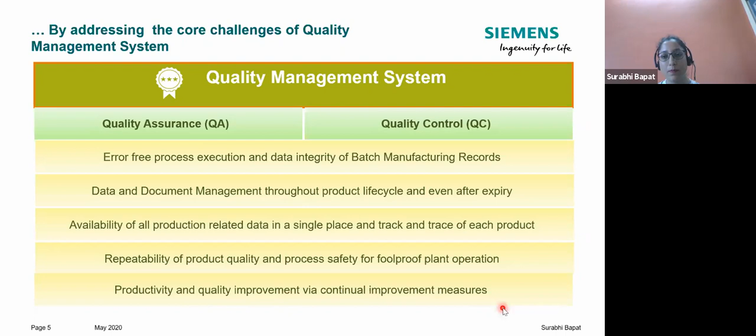So we will first start with the bottom layer or the production layer because we all know that if there are any gaps in this layer, they are going to make their way to the top. So making the production layer robust is very, very important. Now, the first topic that I am going to introduce today is called digital twin or a virtual twin. All of you would definitely have heard about this. You also would have read about this.

But before we go deeper into the technology part, let us get a perspective on why we talk about digital twin when we talk about quality or addressing the regulatory challenges. Let's take a greenfield plant wherein the actual plant is not yet ready. If I, as an experienced quality professional, with all the experience that I have on taking batches after batches, products after products, can see a virtual plant in front of me, and when we say a virtual twin, it should definitely look like the actual plant, but it should also be able to behave like the actual plant. It should have all the properties of the actual plant. Only then it is a true virtual twin.

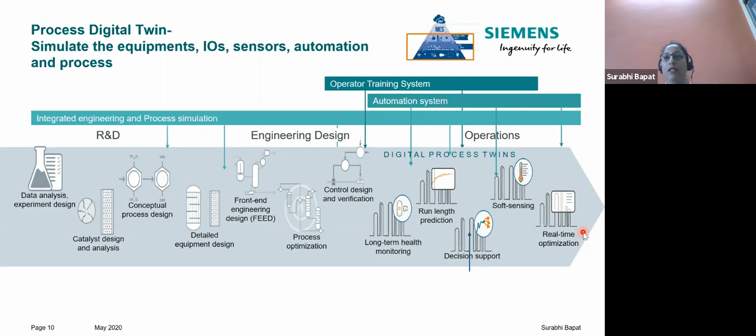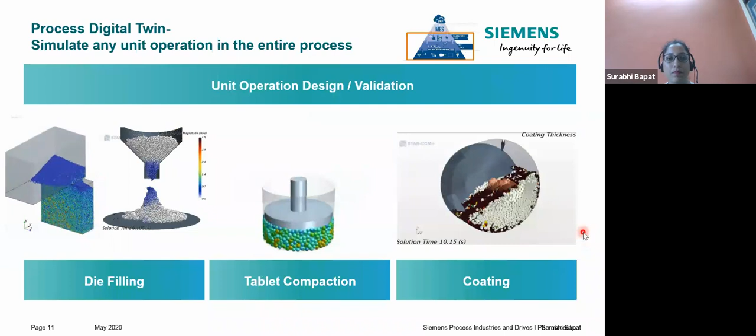Similarly, if we have to do a similar type of simulation, a similar type of analysis for a single unit operation, even that is possible. Also, with the technology, what is possible now is a flow simulation. So, typically, whenever we talk about improvement in the quality of a product, now a product quality is a very big topic, and there are so many unit operations, so many ingredients, I would say, that go along. So, whatever I'm showing you are each of these little pieces which help us to give us an insight to improve ultimately the overall product quality.

So we have tools and tackles available in the form of multi-physics simulation, which is based on computational fluid dynamics, that basically allow us to understand how the different flows interact. So in a digital twin, like I said, if we are simulating the entire process, then also to understand within the process how the flows interact with each other is also very important, very crucial. How we can improve the performance of the equipment thereon, improve its energy consumption, and so on, of course, is also a parameter that can be analyzed.

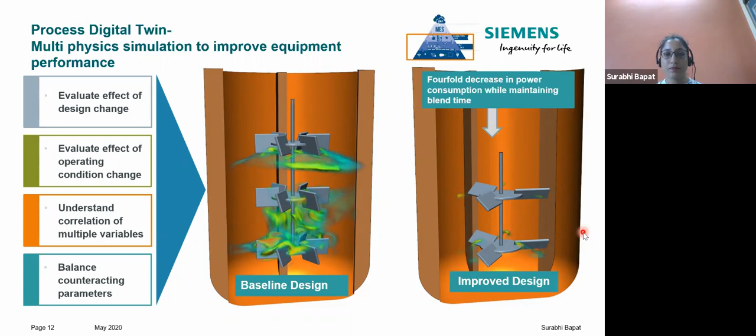So, before I come to the plant digital twin, I would just like to say one statement about the different process digital twins that we saw. See, digital twin is always understood as a topic which is relevant for production, which is more relevant for understanding and gaining insights on yield improvement, on productivity improvement, optimization, and so on. But in our opinion, a digital twin as a concept is extremely useful even from a quality point of view. This is the reason why we started today's presentation with this technology topic.

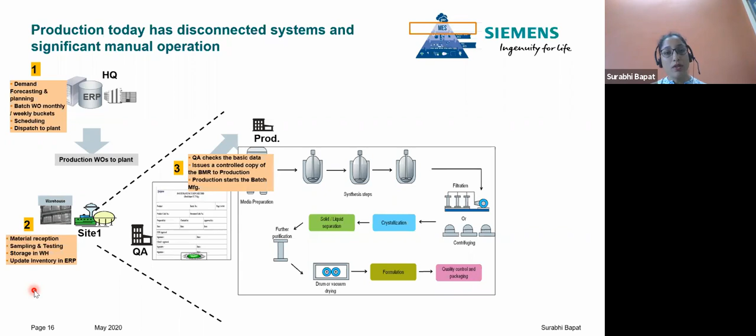When the work orders have to flow into the production area, that is where the manual work starts typically. So the quality team checks the data, issues a copy of the BMR to the production. The production starts, the BMR is filled up manually.

So we might have an automation system which is doing process control, but in a lot of plants we don't have an integration between the automation system and the main core system where there's no MES. So we have manual filling up of the BMRs, and finally what happens is after the entire production is complete, there's a big chunk of documents that requires to be cross verified and checked. Now

MES is this one thread. So what we didn't have here, we saw that ERP is disconnected from the actual production. The data from the automation system is not flowing into the BMRs. The warehouse management system may or may not be connected to the production system. The quality personnel does not have full visibility or transparency of the production process.

So although we might have multiple systems individually controlling little parts. We have an ERP, we have an automation, we have a warehouse management system, but there is no thread that is linking all of them together. And this thread is nothing but an MES system, like we all know and like we all understand.

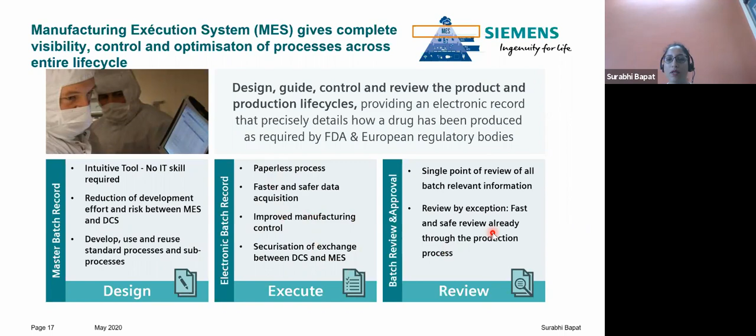How it is executed. So definitely, it's a paperless process. There is no need to fill in the data manually in an electronic batch record. It flows in directly from the DCS, and we know that we do review by exception. So the review process or the checking process becomes very easy.

Again, we won't spend much time going into details of the features because all of you know very well that MES looks after master batch records. It looks after material management. It can also do weighing and dispensing. It has tight integration with automation and ERP. It is able to integrate the packaging system. So this is known to us.

But the differentiators that I would talk about today is first of all, MES systems have evolved in such a way that they actually form the link between layer 2, that is our production layer, and the enterprise layer. And the more we talk about technology, the more we talk of digital solutions, it's very important for us to understand that if we have to gain any insight as a quality person, what would I want to do?

I want to improve the quality of my product. I want to know which batch went good, why it went good, which batch did not go well, why it did not go well. I want to have all these insights. But in order to have these insights, we need data.

Now, MES is one such system which aggregates all the data from the current and the previous batches, all the batch related relevant data, not just the production data, but also the data for raw materials, for the work orders, for the operators, everything in one place. And this can be really, really used in a beautiful way to gain insights.

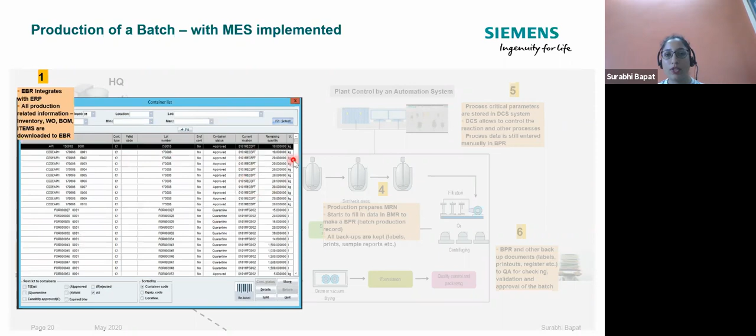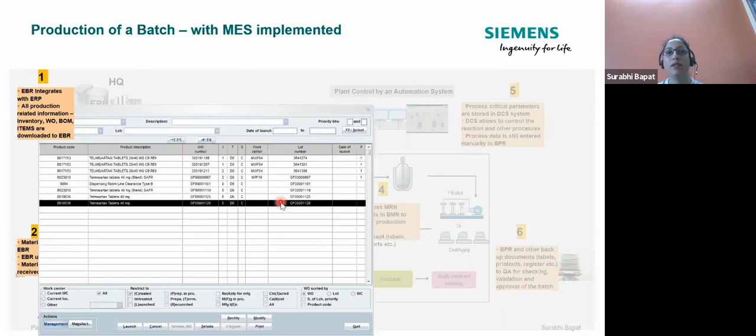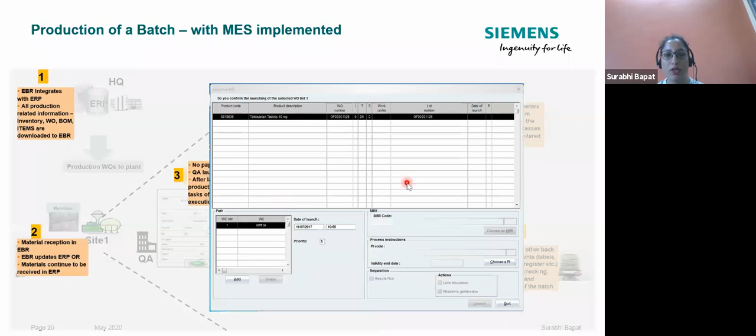Definitely, there is no need to have a manual process to launch the work orders. They are automatically done in the EBR or in the MES system. So the work order in a MES system would flow exactly from the ERP system into the production. We would then have the dispensed material. We would also be able to track what materials are getting used in a particular batch.

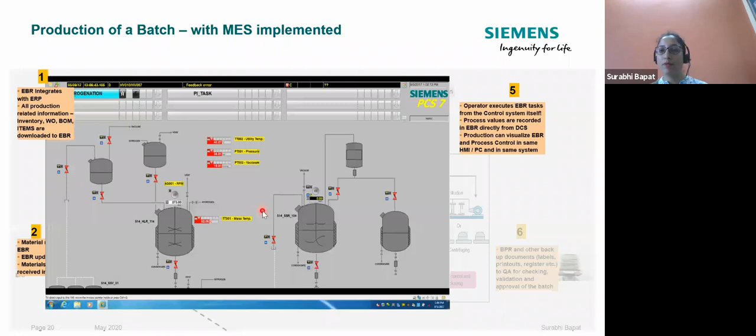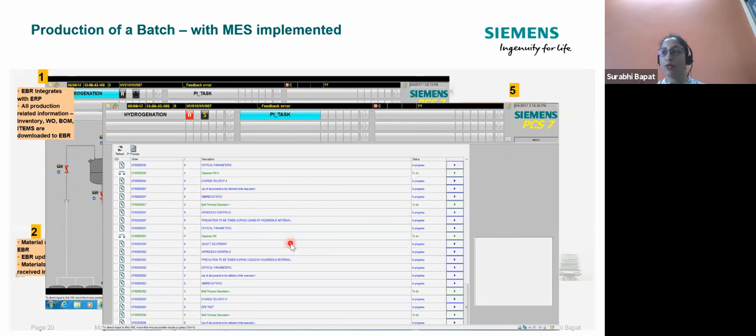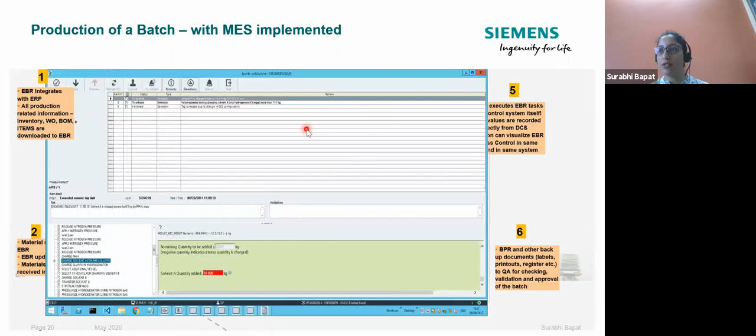The production starts and then the process values are recorded into the recipe, into the BMR directly from the DCS. So there is a close integration between the DCS system and an MES system. Like we saw in the other case, there is no need for any manual record filling. And finally, when we are doing the checks, it is only checking the deviations, only the exceptions, and therefore a lot of time gets saved. So that was about the middle layer.

Now we move to another layer, which is again very important. We started from the production layer, we went to the middle layer, and now we move to the enterprise layer, which is the layer where we aggregate data, we analyze data. Now, why is this important from a quality standpoint? Like we saw earlier, continuous improvement in the quality of products is also one of the goals of a quality management system.

So, when we talk about data, we also learned that having automation, having an MES system is not just important because of their own features. Automation is not important just because we want to have automatic process control, but automation and MES are also providing us rich data from the different batches, which is able to give us valuable insights for continuous improvement.

So typically, when we talk about data analysis, there are different ways to do it. One is descriptive analysis. So we say, okay, what went wrong? What was not okay? And we are spending time on this topic because we see two things typically happening. One is repeatability in the quality of products. That's a tough task sometimes, ensuring that we have consistency in quality. And second is, how can I improve the quality of my product?

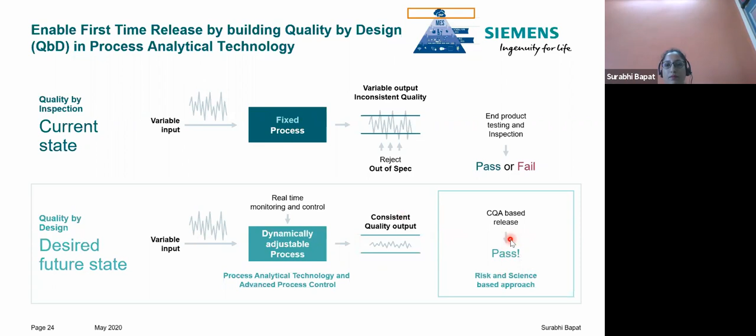Moving on, another important topic that we see very relevant to the industry today is golden batch analytics. Now, I won't spend much time on the actual concept of golden batch and the influence of golden batch on the batch performance, we all know it. But I would definitely say that we have technology that enables us to understand how our batch is performing vis-a-vis the golden batch.

Now going on further, because we saw different types of analysis are possible, and remember, we are now at the top layer, and all this analysis that we are talking about here is possible because we had certain systems, certain technologies that we spoke about in the bottom layer and in the middle layer. All this data from batches is actually coming from there.

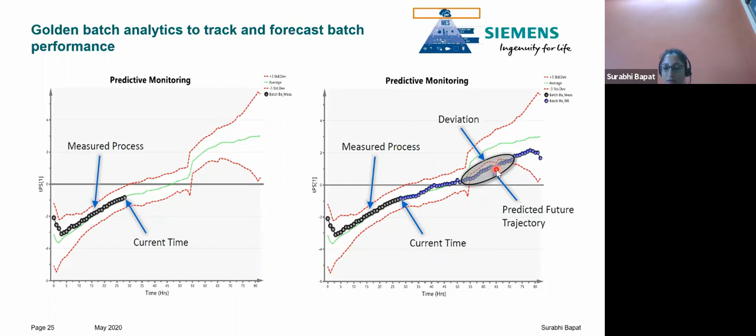Now, moving from analytics and its correlation to quality, how we can improve quality, we now move on, and we are still at the top layer, the enterprise layer. Even if we see the scenario now without any of these technologies getting deployed, we see a lot of tools and a lot of softwares are still used for little purposes. So we always have a bunch of systems in place, and data is scattered all across.

So if a particular decision has to be made, if a quality person wants to analyze what went wrong with my batches in the last month, or what was good with the good batches that I had over the last 1 year, he definitely needs all the data from these multiple systems in one place. So what we see typically is scattered systems, and data not being in a central place.

So we have smart softwares available now which do two things. One is they aggregate data. So you can have your data in multiple systems; as long as it's an electronic system, it's fine. It can be an Excel file or it can be LIMS, it doesn't matter. They aggregate data from these multiple systems. They contextualize data because data, when it converts into information, means different things for different people. For a quality person, the KPIs or the kind of analysis would be very different from somebody else.

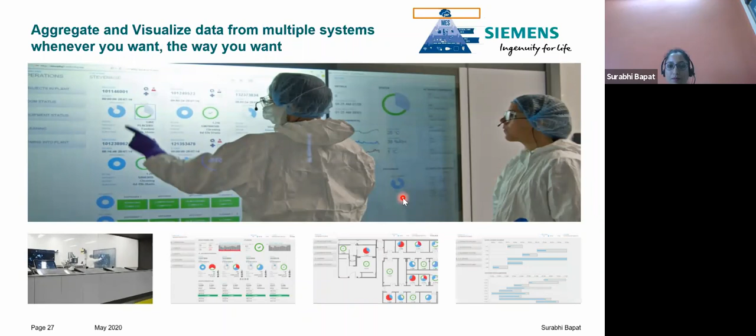The dashboards, yeah, they are good, they look good, that's okay. That's not the heart. The heart is, and the pain point that we address here is, all the multiple systems are brought together in one place.

So with this, let's understand some key takeaways from today's session. Because we talked about a lot of technologies. We started from digital twin to automation. We spoke about MES and then we spoke about analytics. So let's do a nice recap of what all we learned.

So, first of all, we need a holistic view from production to the enterprise layer to address quality and regulatory challenges. So, if we want to understand this topic fully, then we have to go across all the layers. This is the first thing that we saw.

Second, digital twin can enable to identify and address quality gaps and improve the overall quality management system. So, one always wonders, why should I have a digital twin? I only have to check the records, perform the audits, and ensure that the quality is perfect. How does digital twin help me? So hopefully we are able to address that question effectively in this session.

That digital twin would really help to identify those gaps, those improvement areas which otherwise are difficult to isolate in a running plant, in a real plant.

Automation integrates seamlessly with the MES and ERP system to build a tight ecosystem. So, we are not talking about automation in its regular purpose. Of course, it will do what it is meant to do, and we all know how it helps in improving the quality. But, like I highlighted, the benefit is in the ecosystem. The benefit is it talking to MES, talking to ERP, talking to multiple systems, and then bringing a cohesive environment.

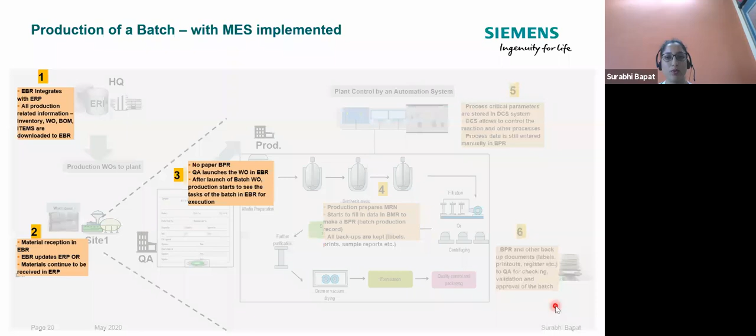Now, like we said, let's understand the different parts of automation. And so, one part that we all know and understand is that automation helps in process control. Yeah? It helps in ensuring that the process happens the way it is expected to be. So, I'm just trying to go to the slide where we talked about automation so that it's easy for Mr. Madan Mohan Khanna. Your question.

Okay. So we all know how automation would help us to ensure that the operating procedures are followed. Now, how can it improve the overall efficiency? For this, we really have to look into little points. What if we don't have the automation system? What would happen? First of all, whenever we talk about execution of process manually, definitely it's going to bring in errors. And an automation system, with the inherent features that it has, can not only control a process, but can also execute the operating procedures seamlessly and accurately.

So there was one more question from one of the participants: if the set points are put in manually, how effective is the automation system? Yeah, you are absolutely right. The moment there is a person involved, or the moment there is anything done manually, there is always a chance of error.

So if we are talking about a foolproof system, when we talk about MES and automation coming together in a plant, the SOP or the procedure is running in the MES. It is defining the task that has to be done. The task is then executed by the DCS system. The records are automatically fed from the DCS system into the BMR, and the process goes on. So if we implement a fully automated system, we get the best benefits. We reduce the chances of errors to the bare minimum possible. We improve the speed of operation, because

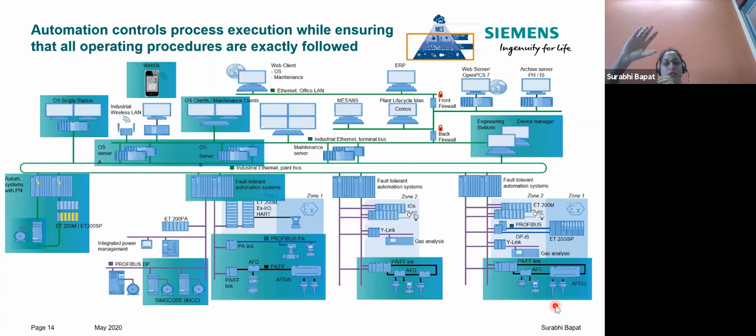Automation, digitalization. So see, digitalization is a very big word, I would say. What we really talked about today in the production layer and the middle layer is the digitization part. Yeah? When we say digitization, it is enablement of data. And what we talked about in the enterprise layer, the last part on the data analytics that we spoke, that was really the digitalization piece, where we say we are doing quality by design, we are doing analysis of our batches, we are trying to gain insights. So automation, MES, and digitalization, I would say, are closely integrated with each other.

Okay, let's see. So there's a question, does MES modules address automation as well? Now, this is a question from Mr. Anand Prakash. So, see, MES is a different concept than automation. So, what you see on the screen is a separate, so it's called a distributed control system. It's a separate software that is used for process control. So, if you see in this diagram, typically you have all of these IOs from the field. They are connected together to single stations or clients, and we have the distributed control system or the DCS software that is installed on this. So this is what is automation, which takes care of process control.

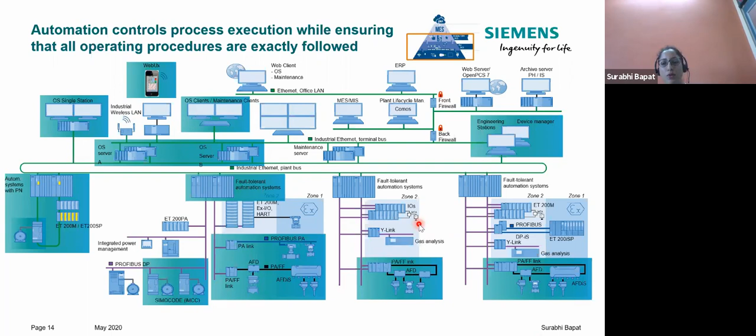MES integrates with automation. So let me move to this slide. Yeah. So when we talk of an MES system, which I keep saying is a thread between the ERP system right until the final production and packaging, automation system, which is doing the process control, would integrate with the MES system so that any data in the automation system is automatically pulled in the MES system, and typically this is done when the BMRs have to be filled up in the actual production. So that is how integration of MES and automation takes place. Okay.

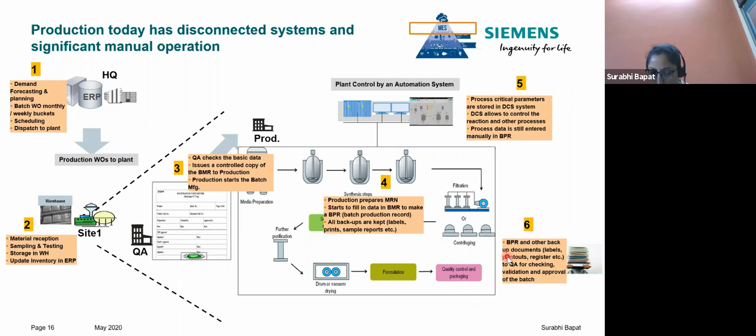There is one question from Mr. Chintamani. Does this system cover all FDA and other applicable regulations? Many FDA offices require manual data. So for sure, all the regulations that are cited in the FDA, all the systems that we spoke of effectively address, and like I said, they are compliant also to 21 CFR Part 11 standards. So yes, a definite yes there.

If there is any manual data, we really need to see. However, as far as the first part of your question is concerned, yes, all the regulations and all the standards are fully followed.

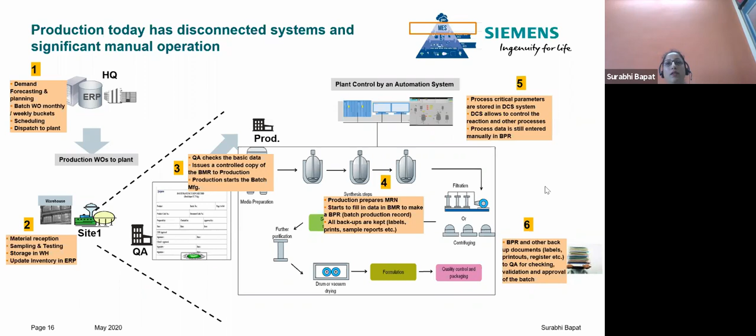Okay, there is one question on reliability of data. So does it ensure reliability of data? And I presume probably you're relating to all the layers. There's a question from Arun Gupta. And if yes, how is it done? Now, see, when we talk about reliability of data or integrity of data, when compared to a manual operation, and we compare a manual operation to an electronic operation facilitated by an automation and a MES system, for sure the reliability of data would be much more, because the inherent errors that would come in a manual operation would not come.

So whether it is picking up of the process parameters from the DCS and entering it into the BMR, whether it is integration of the warehouse and the ERP system into the MES system and the work orders getting generated from there, whether it is the deviations that are recorded in an MES system. I believe strongly that the moment we have these systems integrated with each other, and this word is very important, isolated systems, no good. An MES system integrated with the automation, with the ERP, with the analytics layer on the top. The moment we have this, I think reliability of data is very effectively ensured.

The second point here is these systems are compliant systems, meaning they are designed in such a way that they would not enable tampering or breaching of data. So, be it automation or be it MES, usage of compliant systems is also very important.

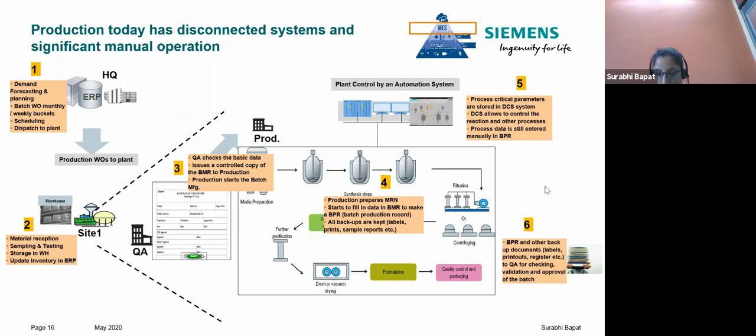So, and the actual process equipment also. So maybe what we can do is I'll ask one of my team members to get in touch with you and to take you through these cases in detail so that you can have a look.

Okay, there is one question from Mr. Ankit. How do the IT and pharma personnel collaborate while designing any automated system, as both have a different working area? Absolutely true, Ankit. And that is where a lot of times today we talk about integration of the IT. So, what used to happen traditionally in the automation system?